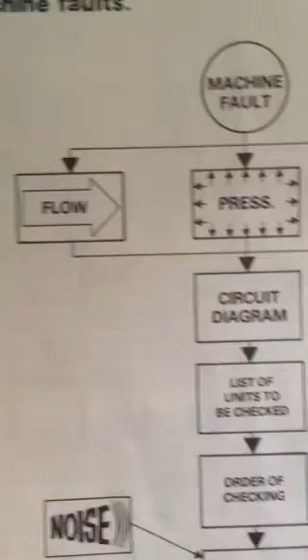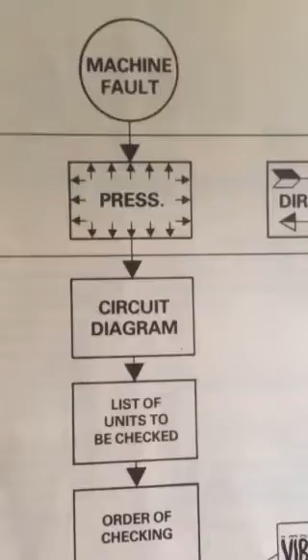What kind of machine faults can you face in hydraulic machine systems? You can face flow problems, pressure problems, direction problems. Then you have to understand the circuit diagram of the machine. Then you need to know the list of the units you need to check and what should be the order of checking the units.

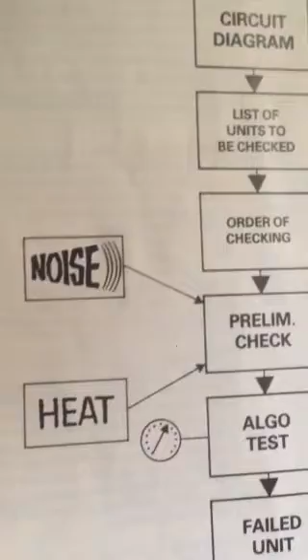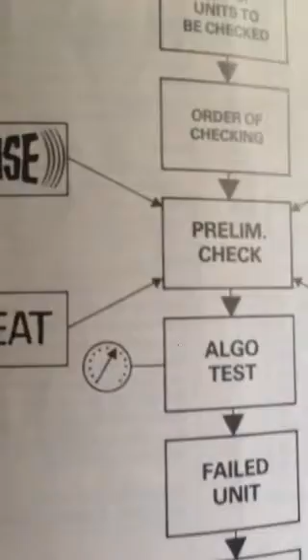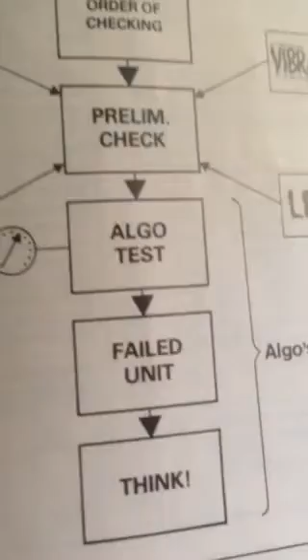If you are facing a noise problem, you should know what are the preliminary checks of the noise. If you face a heat problem, you need to know the preliminary checks of the heat, vibration problem, leaks problem, algorithm test, failed unit, and you need to think logically for troubleshooting all the machine faults in the hydraulic system.

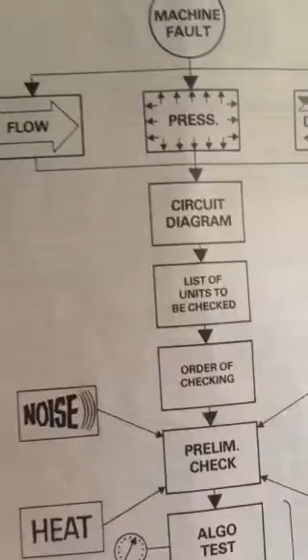So if you think logically and you troubleshoot logically, you can troubleshoot in less time with less machine downtime.